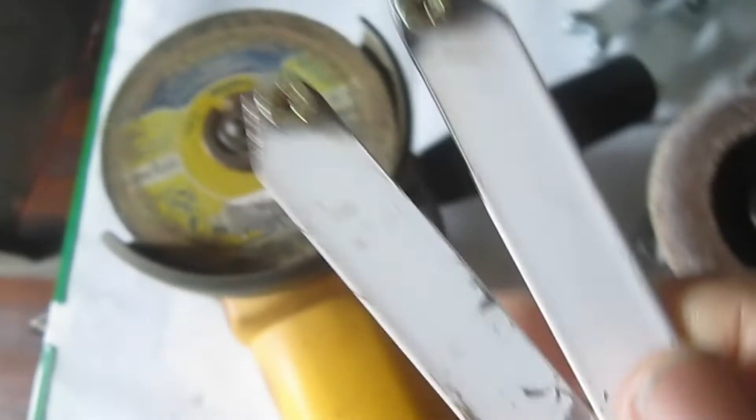I'll teach you how to make your own pin wrench for your angle grinder and also for the adjustable cup of your bicycle.

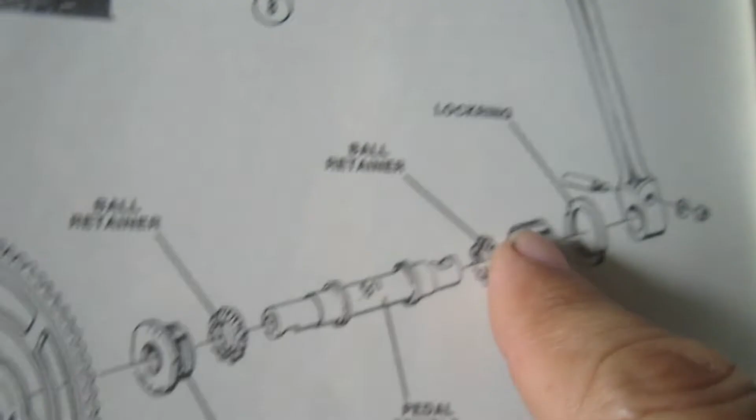Some models still have this. This is the adjustable cup. You have to have a special pin wrench, to be able to adjust the bearings inside.

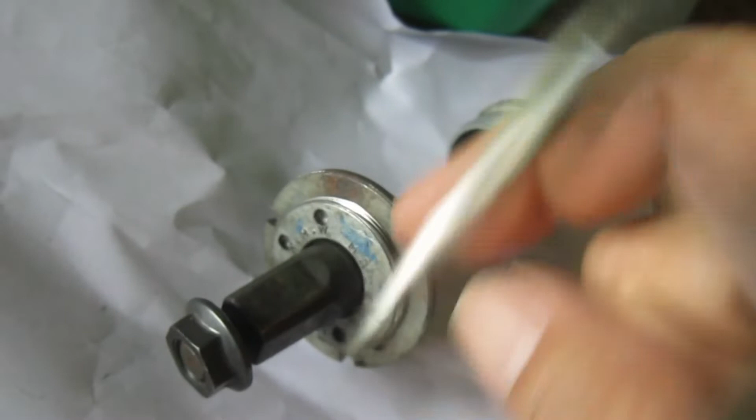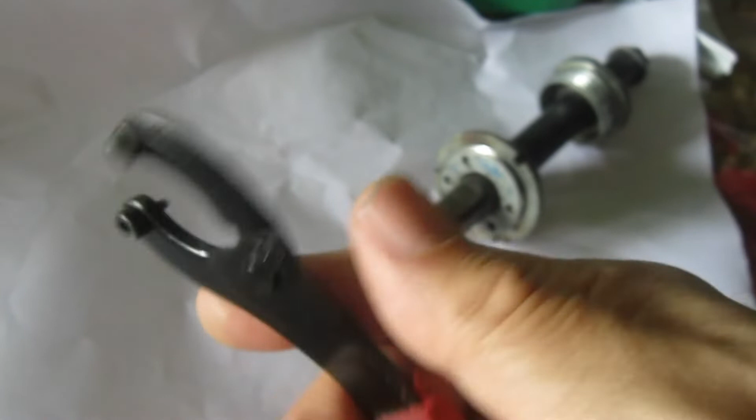Now this is the bicycle pin wrench that you can buy online or in bicycle shops.

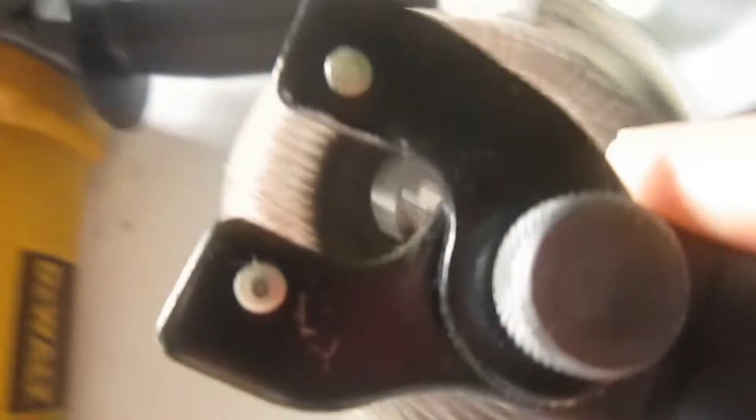And this is the pin wrench for your angle grinder, which you can also buy at the hardware store.

But instead of buying, I'll show you how to easily make your own pin wrench for your angle grinder and your adjustable cup in the crank system of your bicycle, or bottom bracket.

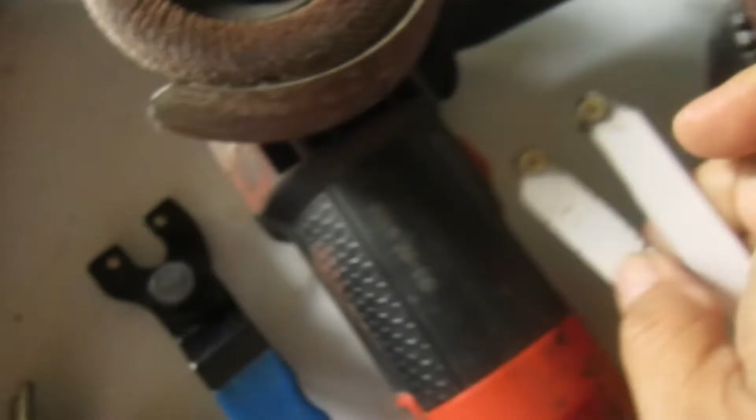Now, if you would notice, this is adjustable because sometimes...

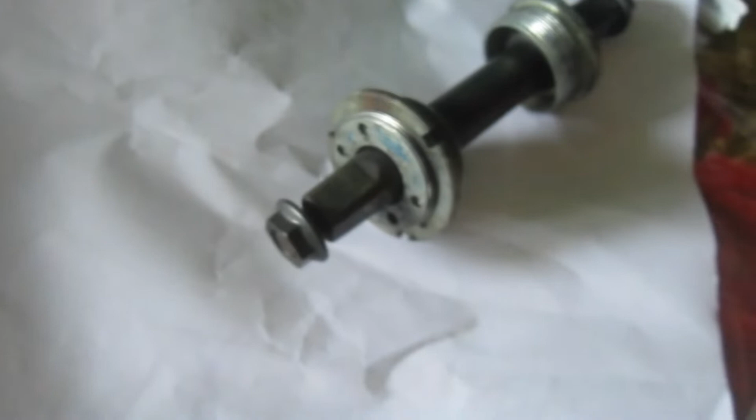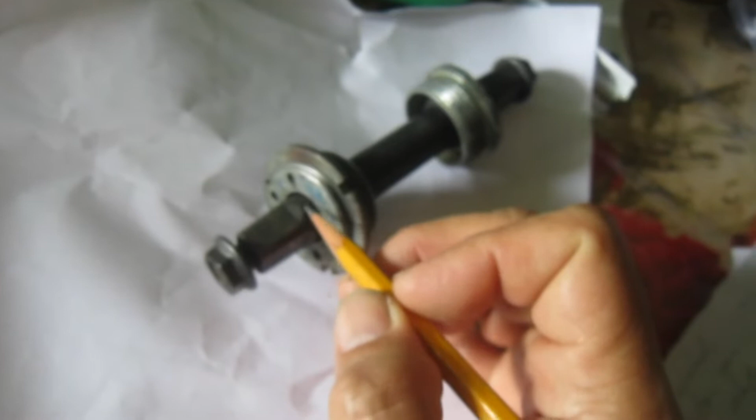the diameter of the spindle or axle is big, so you have to have clearance so that while you're turning, this part won't be rubbing the diameter or the axle of your crank system.

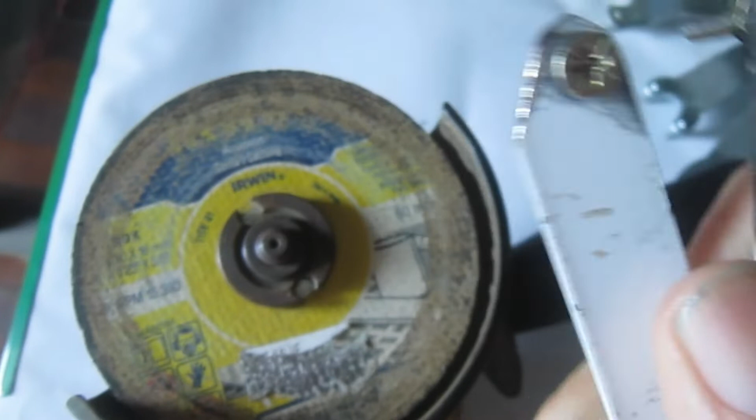Now, if you're working on angle grinders, you really don't have to have this portion, this clearance here, because anyway the protrusion is only small. Actually this one has no protrusion, only this one.

Whereas if you're working on your bicycle spindle or axle in your crank system, you have to have clearance because of that portion, this portion.

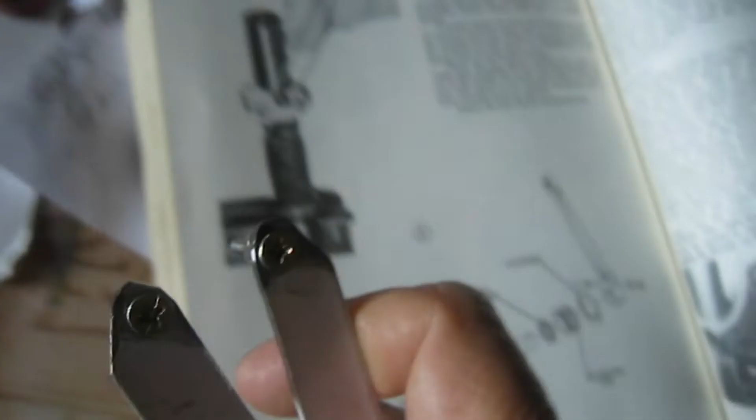So since I will be teaching you how to have a universal pin wrench for both your angle grinder and bicycle in adjusting this adjustable cup, I'll show you what modification you can do so that you will also have this clearance.

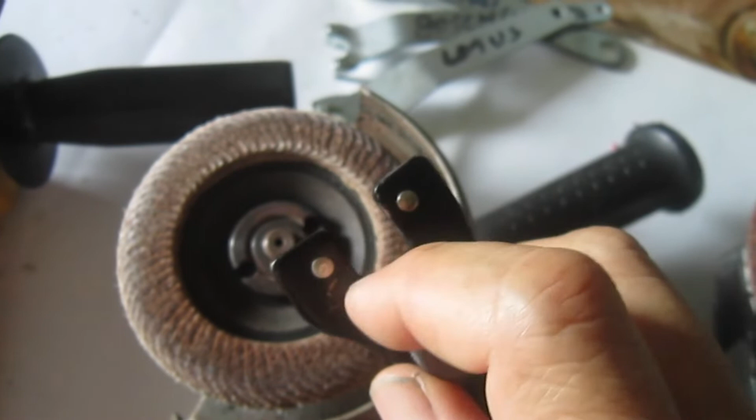By the way, the pin wrench for the angle grinder also has clearance here, but actually you don't need that when you're building your own.

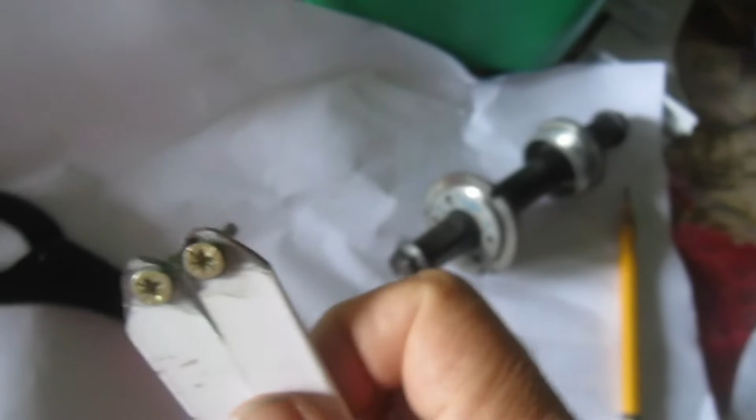But again, if you're going to use your angle grinder's pin wrench also for your bicycle, you should have clearance here, so you will have to grind this off.

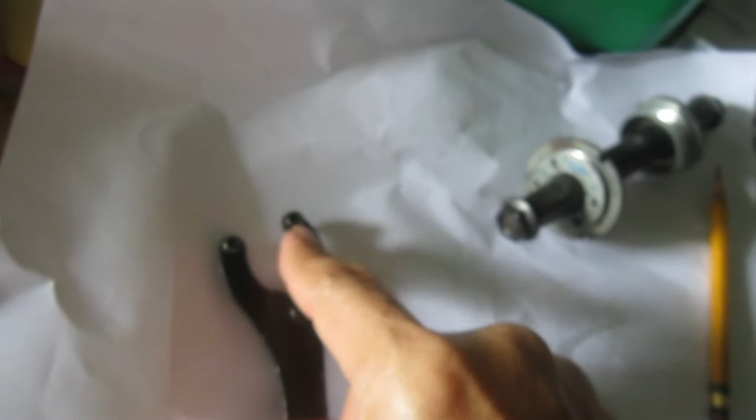To copy the clearance here, the curve clearance, to accommodate the diameter of your spindle or axle, because if it's straight you would be rubbing this portion.

By the way, in my experience, I have several angle grinders because when I'm doing metal work, when I'm welding, I usually need at least 3 discs.

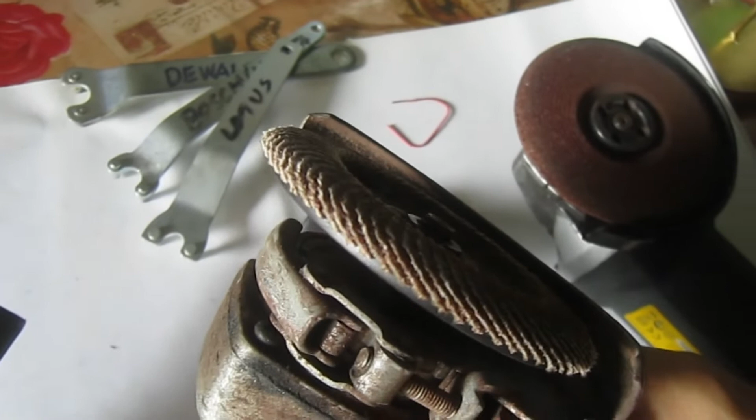So this one is for cutting, this one is for sanding or polishing, and this one is for grinding. So it's ready. Instead of removing them every time I need a new disc, I just have the 3 available.

Now I noticed that the Bosch and Makita pin wrenches are interchangeable. However, as regards DeWalt and Lotus, the pin wrenches are not interchangeable.

So while you can use this on your DeWalt, you can't use this on your other grinders, and vice versa. You can use this on Lotus, but you can't use it on the others.

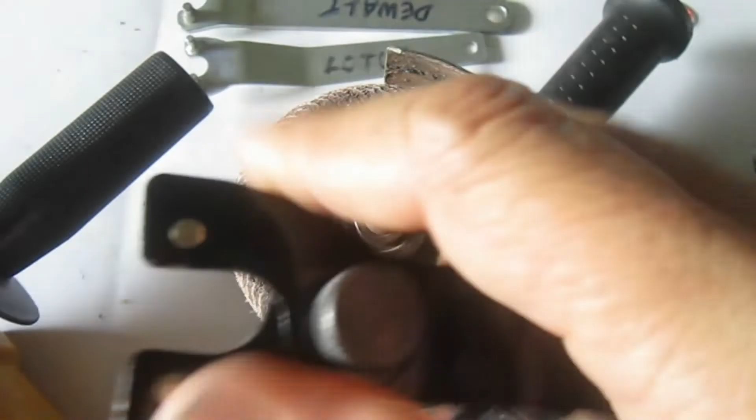So your remedy is to have this one. You can buy a ready-made adjustable pin wrench to accommodate whatever angle grinder you have, or make your own.

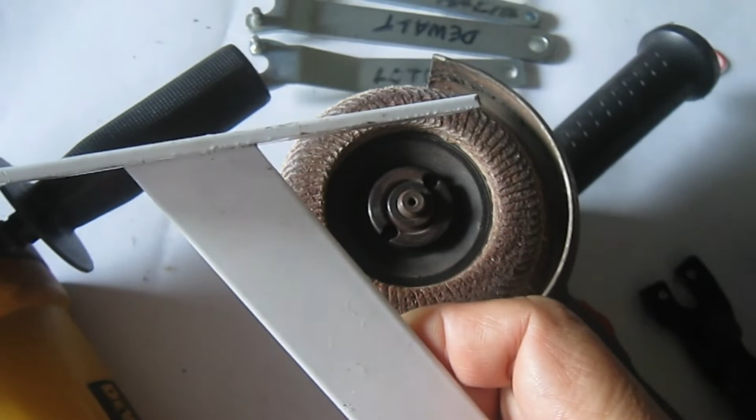So in making this, you only need to buy this, which is part of a bookshelf bracket. I just cut certain portions to have these flat bars.

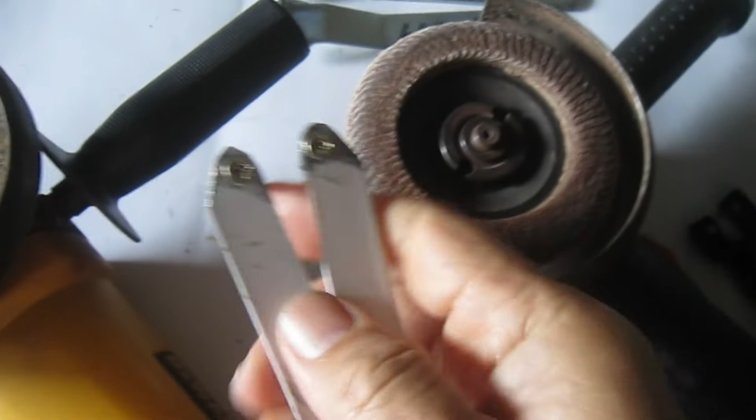Now if you would notice, since one is on top of the other, naturally the tips of the pins are not level, so your remedy is to cut this portion with your angle grinder.

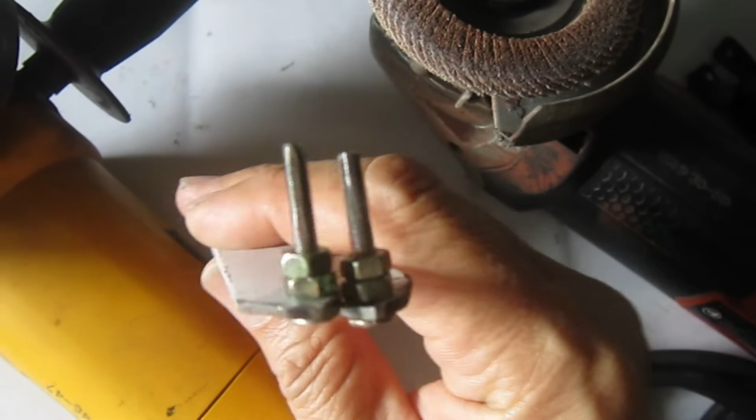Okay, actually this will do, but I want it to be level, so later I'll cut this so that it will be level like this. So these are level.

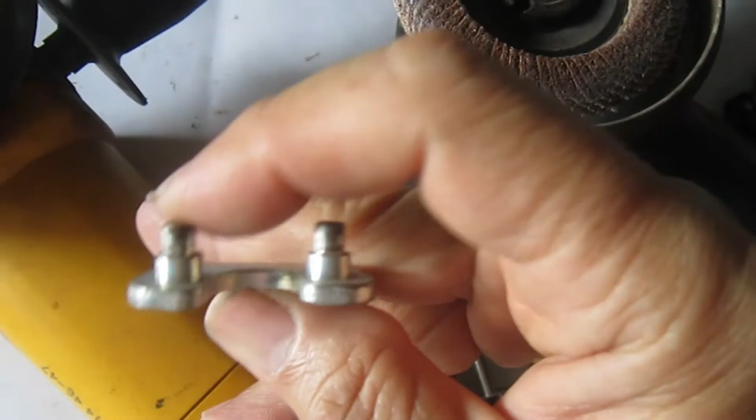This one, because one bar is on top of the other, these are not level. This one is longer than this one, so I just have to cut this with my angle grinder later.

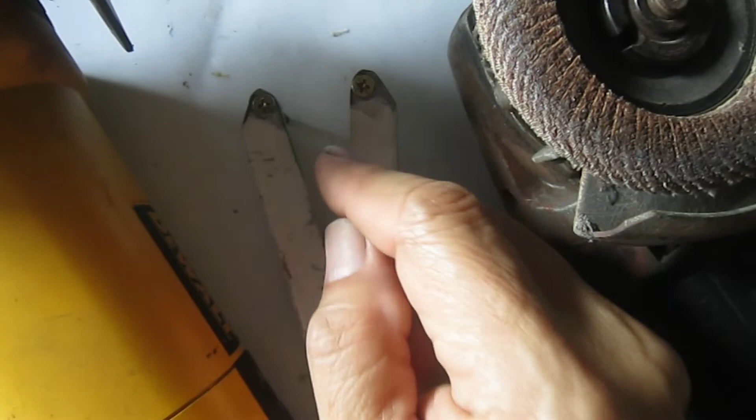Now to copy this clearance seal here, all you have to do is grind the portion here and over there, so that there will be a clearance for your spindle or axle here.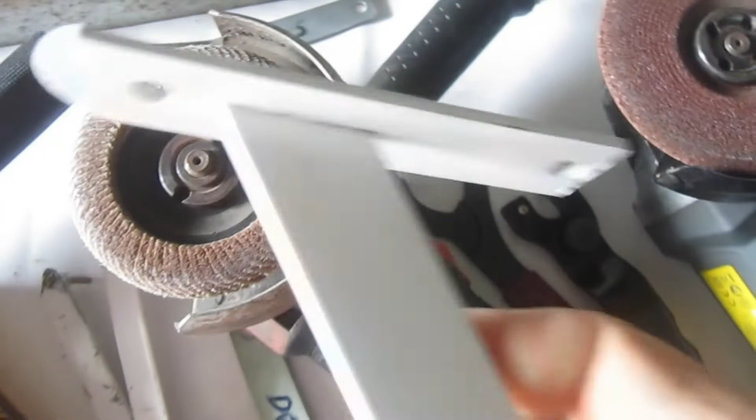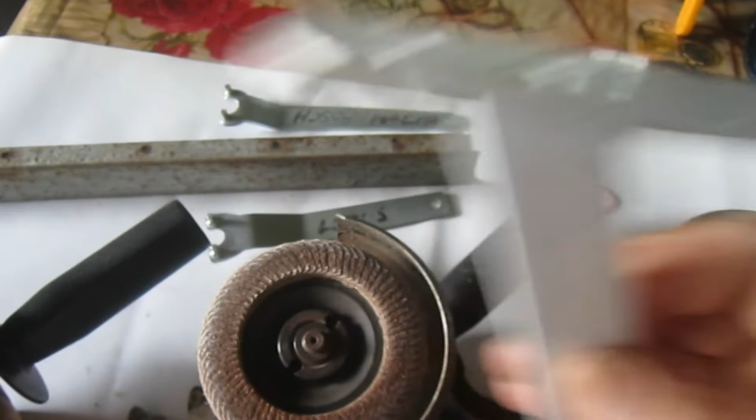So as I've said, you can get your flat bar from old bookshelf brackets, L brackets for your bookshelf. But if you don't have this, you can easily cut the portion of an angle bar.

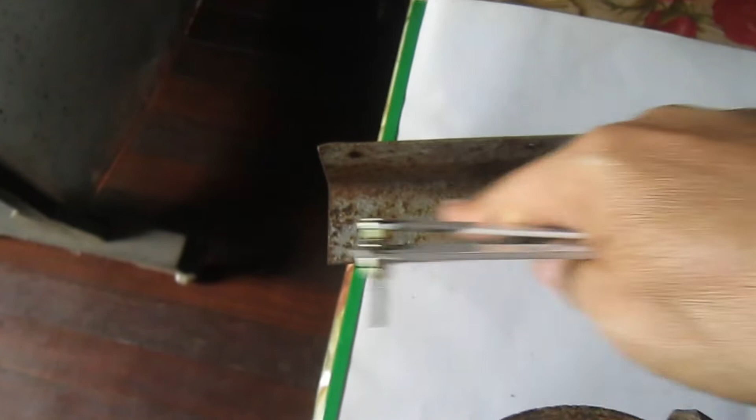And get two handles now. So you cut this into half, you'll already have two handles. And then you just have to drill holes for the nuts and bolts.

I usually place two nuts here because this has a tendency to be loose with constant use. So if you use two nuts, it will stay put.

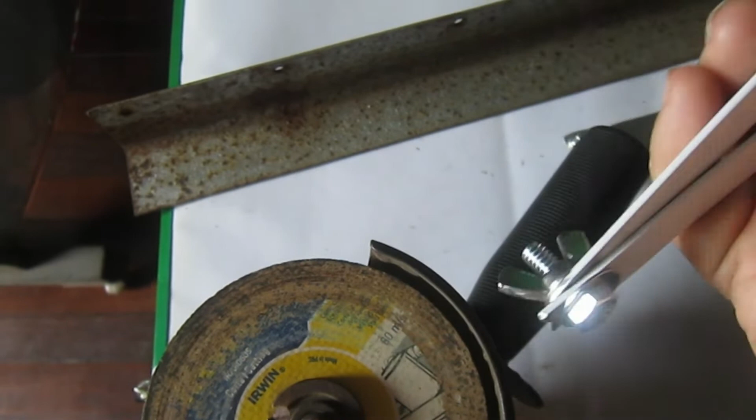And then here, so that I can tighten it, I just use a 1-inch nut and bolt.

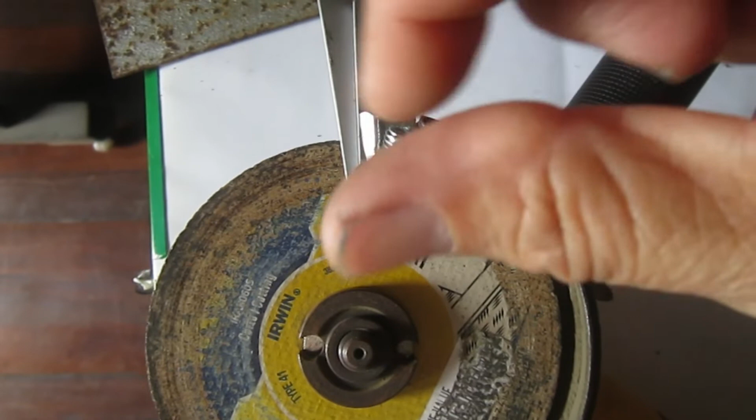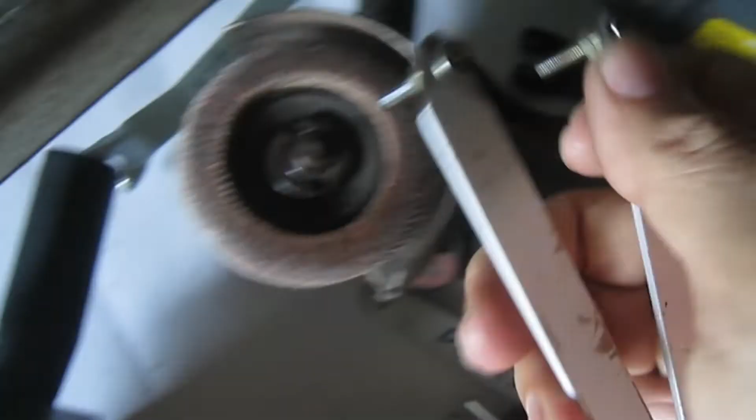But instead of placing a nut here, I use the butterfly nut so that I can tighten this portion with my fingers, to accommodate any distance of the two holes in your angle grinder flange. So you can adjust it, or increase it if you're working on your bicycle crankset.

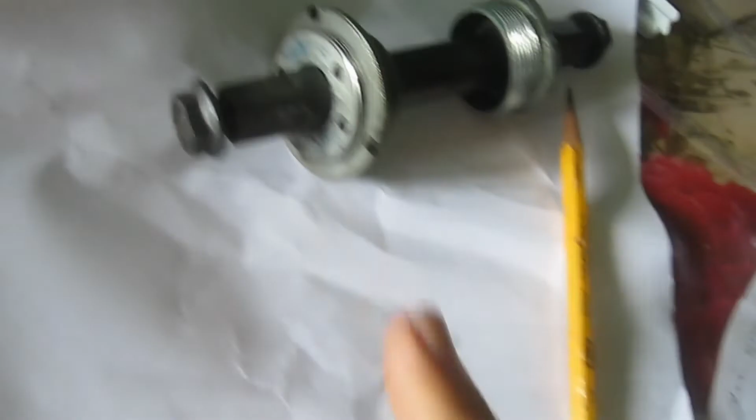This portion, the adjustable cup, is this portion in your crankset. This one is the adjusting cup or adjustable cup.

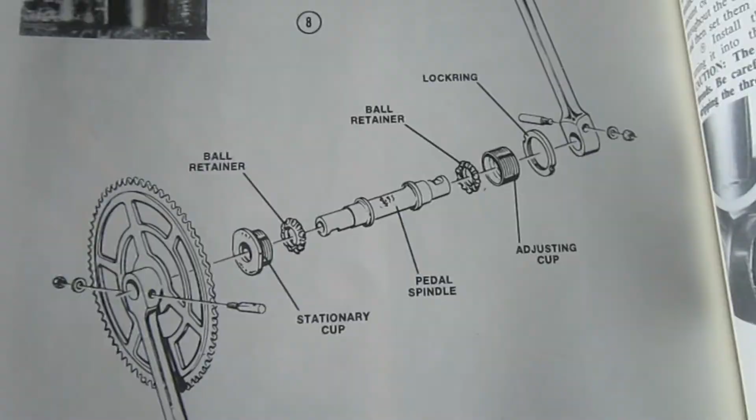By the way, if you're going to buy a bracket and you don't have spare metal bars, you can buy this one. I saw this in the hardware store. There are already holes, so you just have to cut this and shape it with your angle grinder. You'll end up with something like this. Cut this off with your angle grinder and then shape it this way, and you'll have something like this.

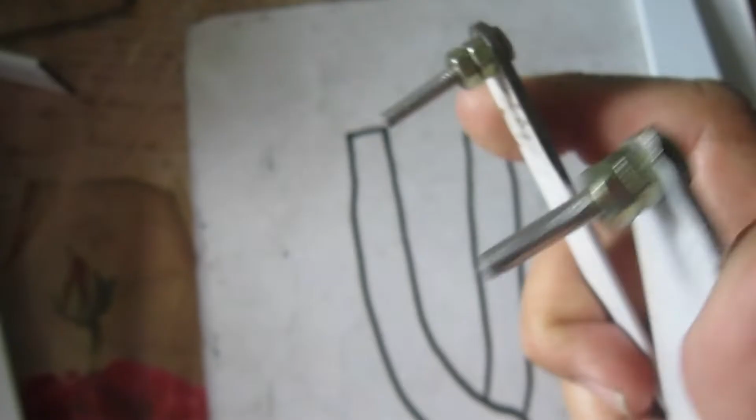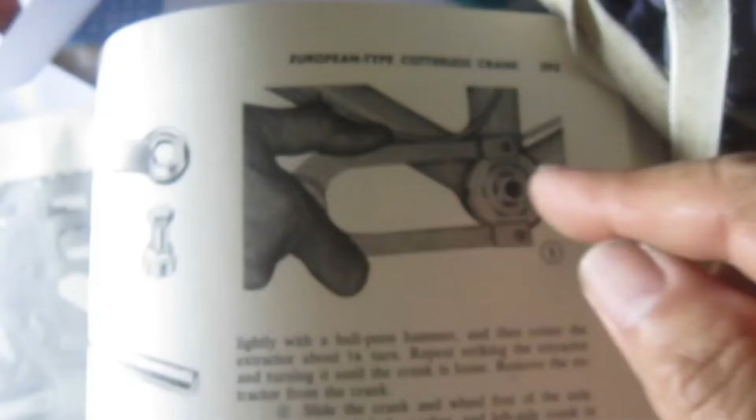Then put two holes there for the pins. Drill two holes for your pins, and then drill holes here for your adjusting screw. So you'll have this pin wrench with this kind of design. Here the pin wrench is curved over here, just like that.

So I'll cut off this portion to make them level. This one is longer, the left one is longer than the right one. I'll cut this off like that, and then imitate this portion.

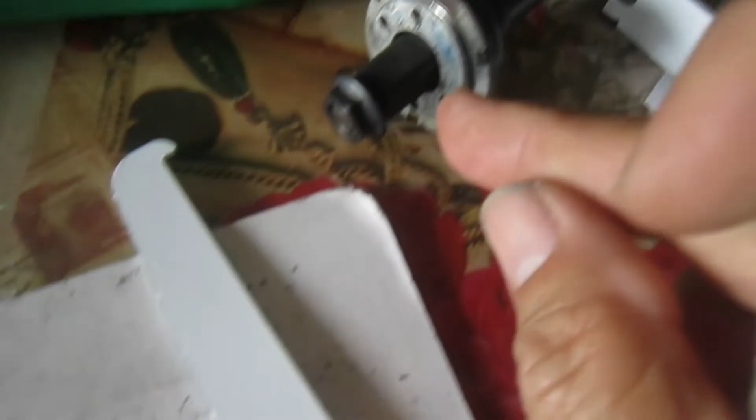So I'll just grind it like that. I'll remove the black pentel pen mark from the right side and the left side, so that there will be clearance to accommodate the spindle or axle of your crank system. So like that.

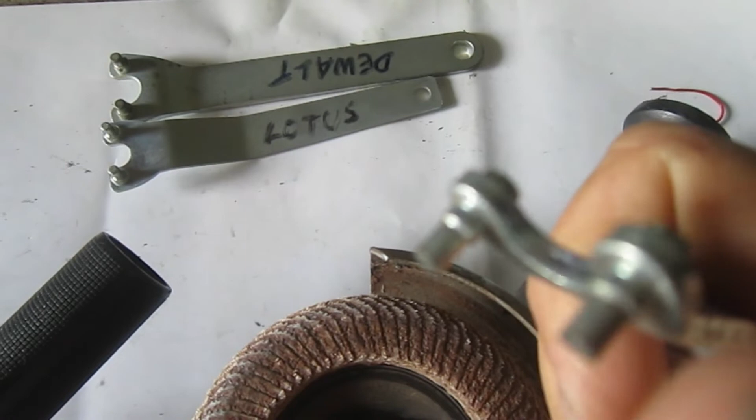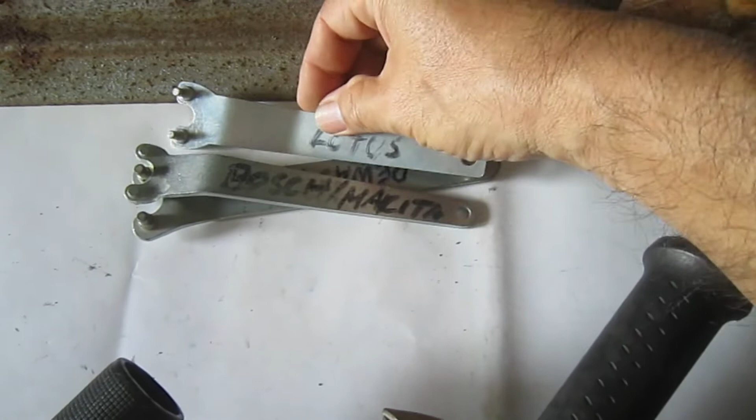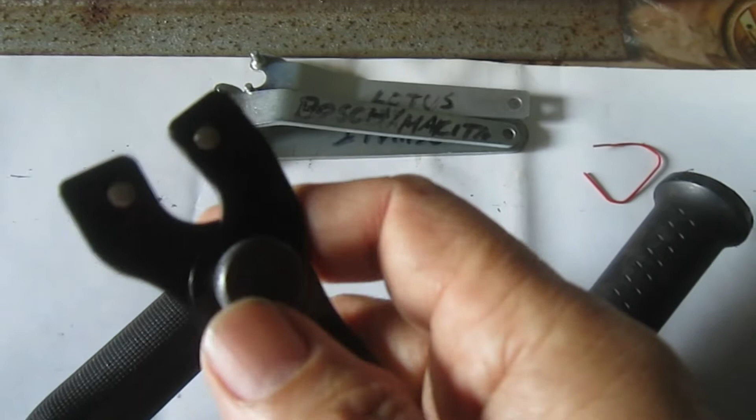By the way, if you have several pin wrenches for your different angle grinders, these have the tendency to get misplaced or lost. So your remedy is to tie them together with a piece of wire, but it's very bulky and heavy in your toolbox already. So your remedy is to buy an adjustable pin wrench, or make your own.

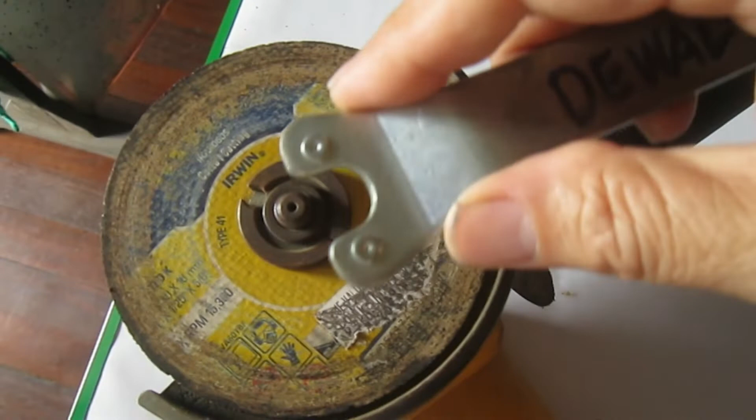Supposing you forgot to bring this to your work area, but what you brought is a pin wrench that only fits this one but does not fit the rest, there's a technique. Supposing it won't fit, your remedy is, if you're tightening, you put one pin on the hole and the other on the side, and then tighten it as usual.

If you're going to loosen it, you put one pin there and one pin at the edge, and then loosen it as usual.

The problem is, if you're strong, you'd notice that if you've been doing a lot of metal work or DIY stuff, your grip and muscles become strong. You might be too strong, and if you do that thing, meaning you put one pin there and tighten by placing the pin at the edge, you might crack your cutting disc. Remember, this is very brittle.

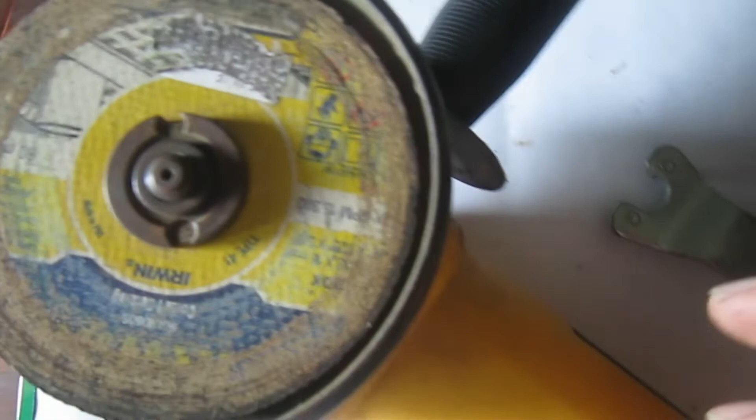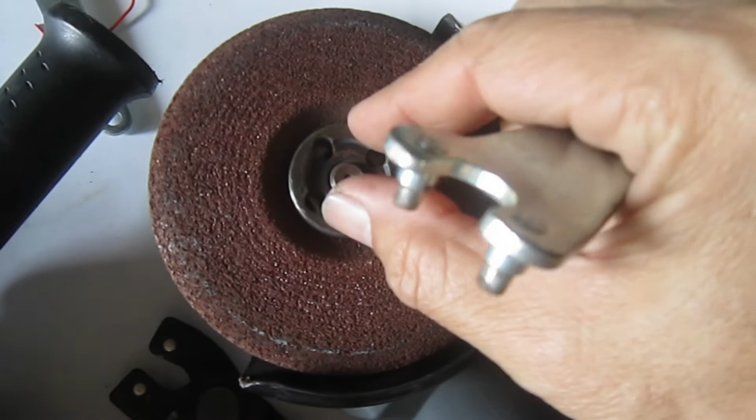If you crack it there and don't notice it, this might explode. So if you're working on a grinding disc, maybe you can do that, put one pin there and one at the edge, and you'll be able to tighten or loosen it. But if you're working on a cutting disc, it's very brittle, you might crack it and not notice, and it might explode because it will be weak there already.

Not only that, if you keep doing that, eventually you'll be denting the edges of your flange. So might as well make your own adjustable wrench, so you won't be damaging the sides of your flange.

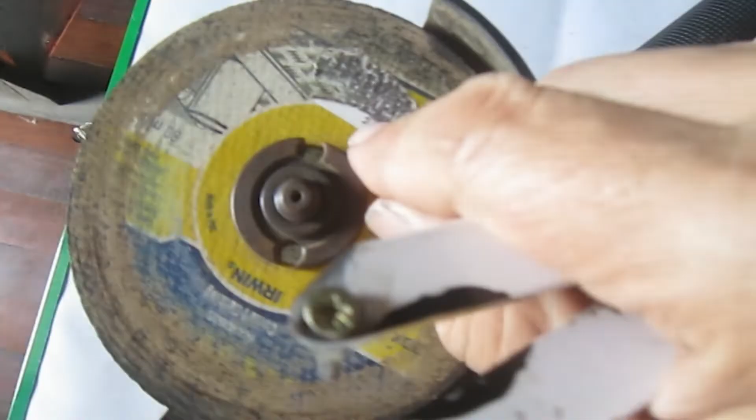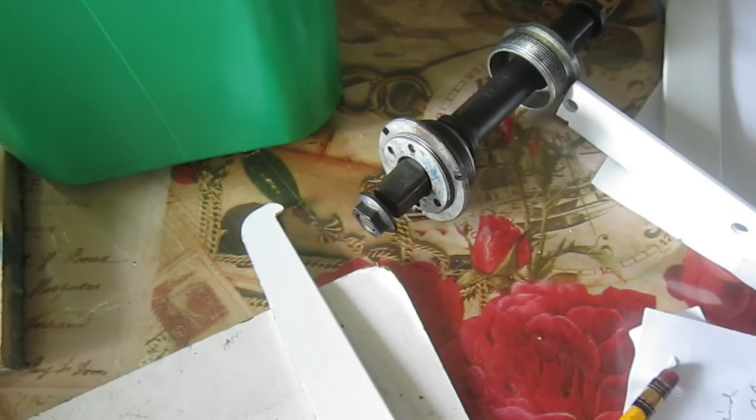So that I'll have clearance here, I'll just grind off the area marked with Pentel pen, left side and right side, so there will be clearance for the axle or spindle of your crank system. By the way, for the pins of the wrench you're making, just buy a pack of this size of nuts and bolts, so you can use them as the pins of your DIY pin wrench.

So I already cut the long screw to make this level, and I already ground the clearance. You don't have to remove too much material, just enough so that the spindle or axle won't rub against this portion. So let's test it now.

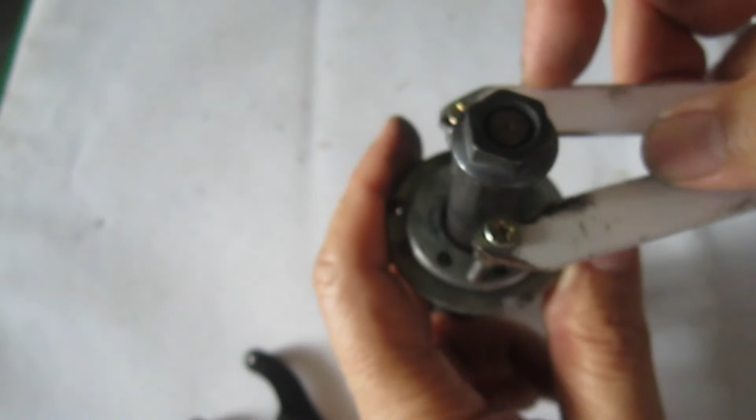So you don't have to over tighten. And then let's remove it. There. Okay, so now let's test if it fits the adjustable cup. There's enough clearance for the spindle or axle, so this portion won't be rubbing and denting that one.

So you now have your own DIY cone wrench for removing the flange when you're replacing your discs, and for adjusting the bottom bracket of your bicycle when adjusting the bearings inside your crank system or bottom bracket.

Okay, time for coffee. Oh yeah.